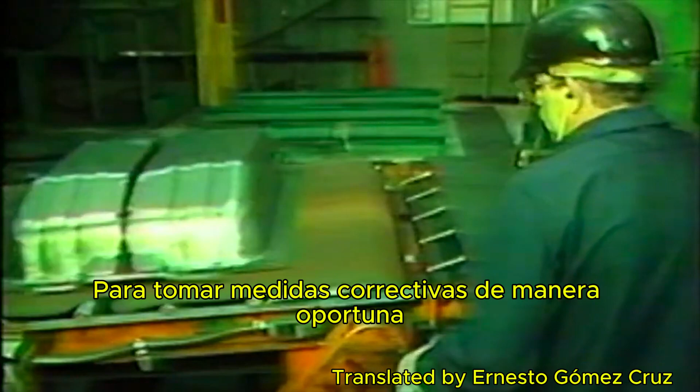Even if layout and operator skills are improved, further gains will not be achieved without a reliable system for monitoring the operation. Also, we need to provide adequate feedback to the people. Quick detection of problems is critically important for taking corrective action in a timely manner. In this session, we will study the means of providing better monitoring and feedback in our daily operations so that our production system can become autonomously controlled.

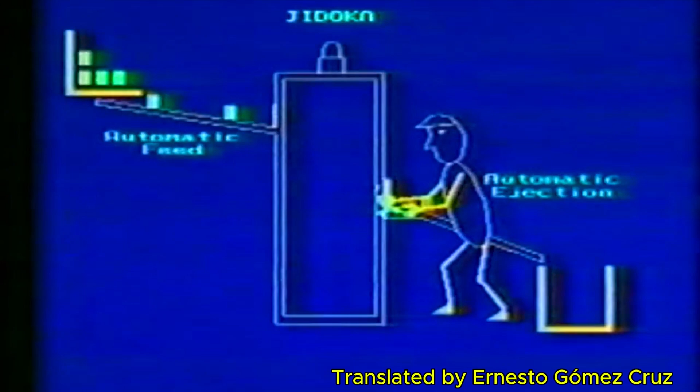Jidoka, or autonomation, is a concept developed in Japan to provide machines with the autonomous capability to use judgment. Without this concept, a machine may move by itself, but it may not be working for you. By using Jidoka, operators can be away or separated from the machine operations, and thus their time can be better utilized. Also, more rapid troubleshooting is possible since problems are discovered on the spot.

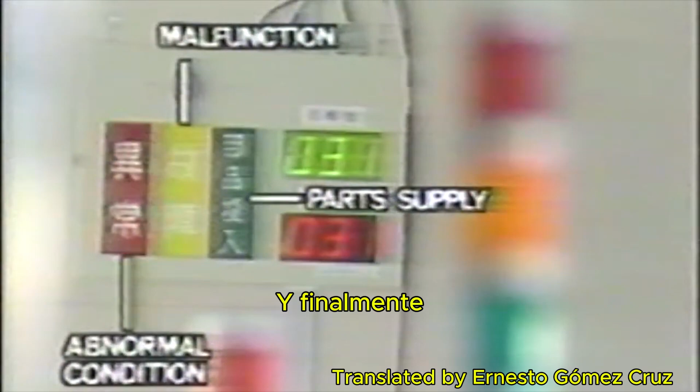Making this work, however, requires a great deal of discipline. Whenever a process is disturbed, we need to identify the problem by first stopping production. Then we resolve the problem and finally regain the streamlined flow as quickly as possible. Otherwise, the same problem may haunt us forever.

The Jidoka concept applies not only to machine operations but also to line operations. This is accomplished with line stop buttons by the operator, where he or she will push the button to get a supervisor's assistance when a problem arises. This concept is called line stop concept and is a variation of Jidoka. By stopping the line, we expose any problems preventing the production of quality products on time so that we can take corrective action as early as possible.

If a line has repetitive problems causing frequent line stops, these will only be fixed by focusing people's efforts. Therefore, we need to develop an effective nervous system in our factory in order to expose the waste and to take corrective action. Jidoka, in its broadest sense, is therefore a concept for exposing problems and taking corrective actions autonomously. To do this effectively, there are several techniques that we can use in developing an effective nervous system. They are Andon, Poka Yoke, and visual control.

Andon means lantern in Japanese. Just as a lantern may guide people walking in the dark, an Andon light helps expose abnormal conditions in the factory. In other words, the Andon, or trouble light, will help abnormal conditions become obvious enough to catch people's attention. Buzzers, and in some cases video cameras, also facilitate communication without delay. When factory operations are linked by these means, the factory will function similarly to our reflexive muscle system. Just as our muscles will pull our hand away if we were to touch a hot plate, corrective action should be taken immediately.

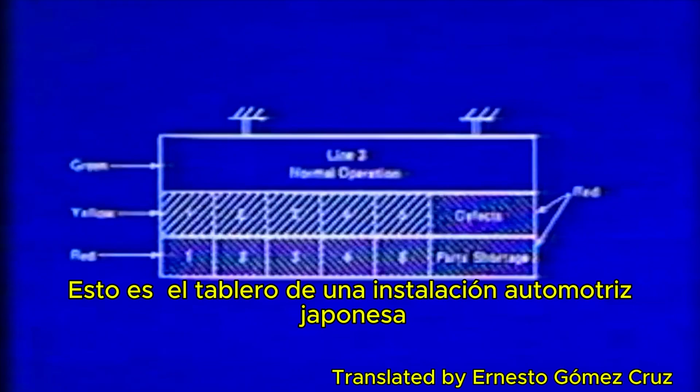This Andon board from a Japanese automotive facility is a typical example. As the light goes on, there may also be music coming out of a loudspeaker. This tune may be specific to a line so that people won't be confused if there are several lines in the same neighborhood. The next example is a parts delivery Andon.

As parts run low, the operator pushes a button that informs the material handler or tracker of his need. This signal is then displayed at the Andon board, signaling the tracker to deliver the parts requested by the operator. This helps keep communication smooth and line-side inventory low. Parts are delivered only when required, not too early, not too late.

Another example of this reflexive muscle system is called Poka Yoke. Poka Yoke is a Japanese word that translates as foolproof or fail-safe mechanism. Poka Yoke helps make the operator's work easier, and at the same time, it eliminates the troubles associated with defects, safety, and mistakes in operation without requiring any undue attention of the operators. There are many different examples of Poka Yoke. This particular example is from Borg Warner.

As the U-shaped line was being developed, the employees came up with Poka Yoke so that they could run multiple machines without confusion. Another problem we encountered was the fact that now an operator had to have more skills. He had to run 3 different kinds of operations rather than just one. And so in doing that, it's easy for an operator to get confused and to load a part backwards and possibly wreck it. And we had that problem on our hobbing machines.

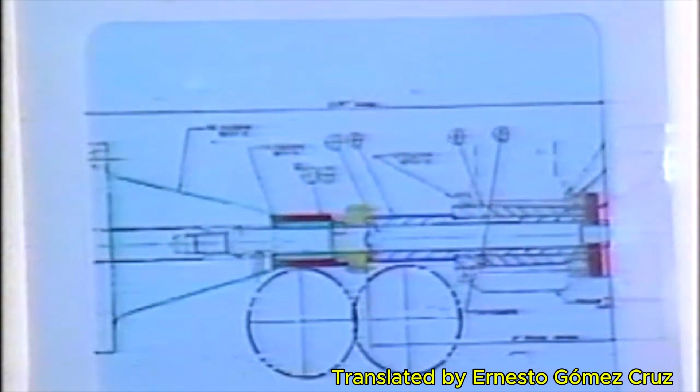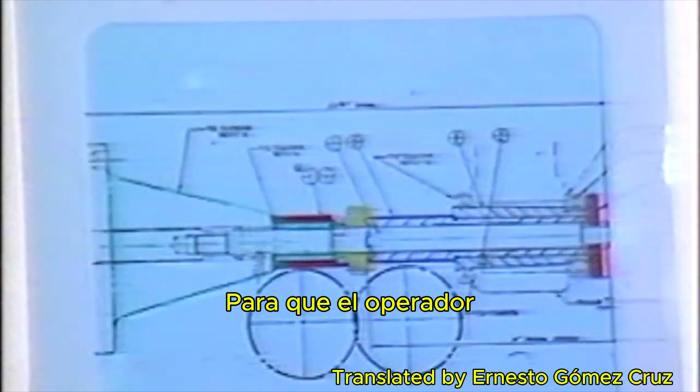And this is the little idler gear, shown here in yellow. And there's a problem with that part. If you load it on the machine backwards, then the teeth are on this side rather than on that side. So when the tool slide comes in on rapid traverse, we would break this cutting tool. And those cutting tools come at about $1,000 a piece. So we came up with the idea to Poka Yoke this so that the operator physically cannot load the machine and start it if he loads it backwards.

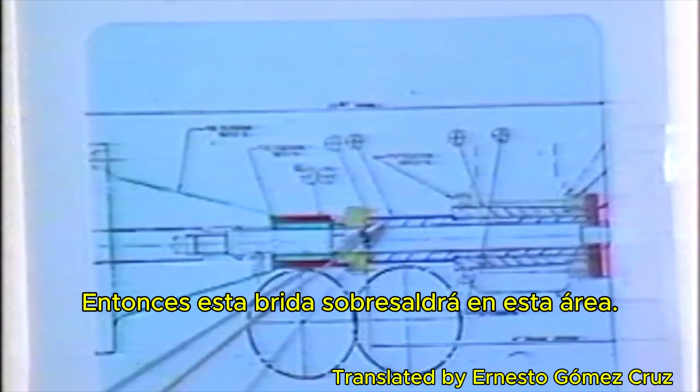And all we did was, shown in red here, is a little collar that slips over the arbor, and it has some little projections on it that go over that flange. So if the operator puts the part on backwards, then this flange will stick out in this area, and then the clamping mechanism here on the end will not clamp. So you cannot load the machine backwards and therefore break the tool.

This is an example of Poka Yoke from the welding shop of a Japanese automotive parts manufacturer. Since many welds were required in this assembly operation, sometimes a weld was skipped. This happened a few times a month, causing complaints from the customer. However, an idea was generated to make a gate, and only when all processes were completed would an electrical signal open the gate up. Since this gate wouldn't open if a step was missed, this type of mistake was totally eliminated.

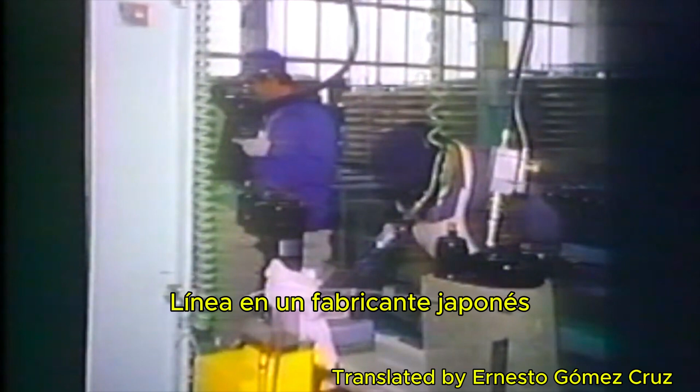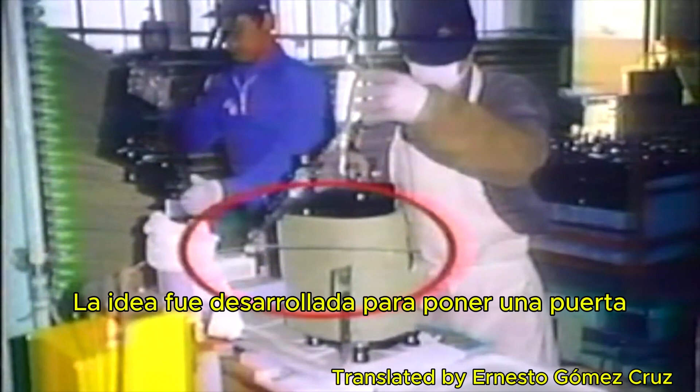This is an example from a compressor assembly line in a Japanese manufacturer, Mitsubishi Electric. In this operation, the operator puts oil into the compressor, but since you can't see from the outside whether oil has been put in or not, mistakes were made. Sometimes too much oil was put in, sometimes none at all. The idea was developed to put in a gate that only opens after the right amount of oil has been put in the compressor. The gate opening notifies the operator that he or she need not be concerned with the oil level.

This is an assembly line in the household goods division of the Japanese manufacturer Aisin Seiki. In this line, different parts are used for different models of their product. Since mixed production requires more frequent and faster model changeovers than a conventional line, the people came up with the idea of using a light indicator to distinguish the different models as a reminder for the operators.

If we compare these previous examples to this example, where incoming inspection is taking place to check the parts from suppliers, we should understand the benefit of practicing quality at the source. In principle, the people who are providing parts should be responsible for their quality, delivery, and cost for their customers. This provides quick detection and correction of problems, while the other is a very slow process.

As these examples of line stop, andon, and Poka Yoke demonstrate, the Jidoka concept can be used to develop an autonomous control system. If we use visual aids to practice this communication and control, we call this visual control. As the need arises and is manifested visually, we take action. However, it requires a great deal of trust and discipline among the people involved for the system to function properly.

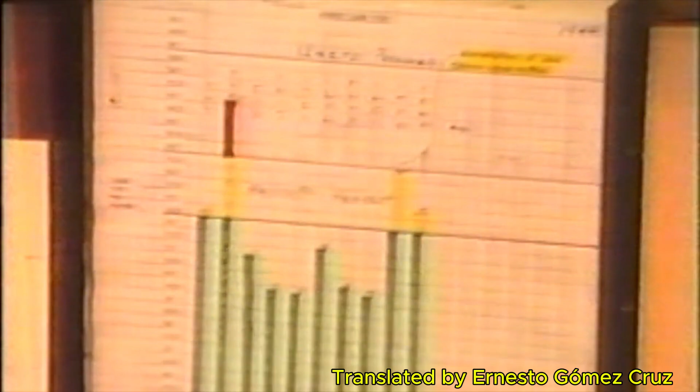If we expand this notion of autonomous control, the Jidoka concept may include the display of charts describing the key indexes, production control boards comparing the scheduled production with the actual, posting pictures from around the factory to address housekeeping efforts, improvement boards explaining before and after situations for people to learn how improvements were achieved, and even yellow lines on the floor showing where to store parts can become part of this monitoring and feedback system. As Jidoka and visual control will increase communication, plant newspapers and photos can also help promote better communication.

We try to do different things. We try to make it more like a family, and what we try to do is get good communications between the different shifts and between the different areas that they work. And one of the ways we've been doing this is through this monthly or so newsletter. And in fact, it's called In Focus. What we do is try to get input from the owner-operators as well as the engineers and the manufacturing managers and production control and everybody, just to get little 2 or 3 sentence news items that people might be interested in, when machines are going to get moved, when things are going to be realigned, when there's cost reductions, they found a cheaper way to do this, or part changes, or just a lot of different information.

Also, we try to have at least a couple pictures in it each time. It's nothing too professional. We just take Polaroid pictures, copy them on just a plain copier, 2-sided copies, do it on my PC with just a word processing package. It's not fancy, but it works.

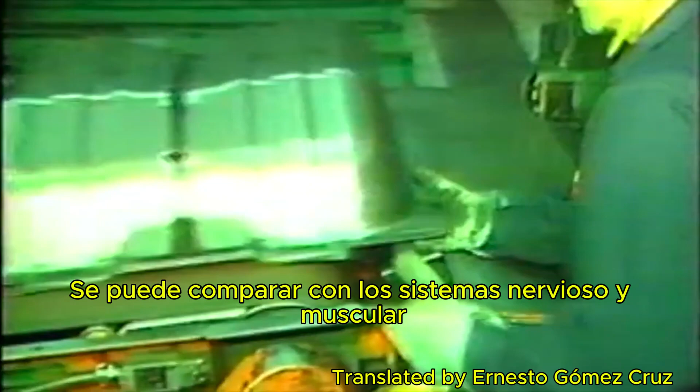In summary, practicing visual control and jidoka can be compared to the nervous and muscular systems in a human body, which can respond readily to environmental changes. The point is to develop a self-controlled system. As mentioned before, however, accomplishing this requires the involvement of everyone.

I like the analogy of the nervous system and information system, plus the simple means of communication. But does this mean you are against the use of computers? Not necessarily, but like anything else, if we do not have an adequate ability to use them, we may find them producing or storing a lot of waste. Aha! So what you are saying is we need housekeeping for the information processing activities as well. Right. Let's take a look.

We began with an order entry process where the order was called in or faxed in, entered into our mainframe. Mainframe would generate the shipping paper and the documentation necessary to pick material and issue an order to the shop floor for the shop floor to begin the manufacturing process. The overall cycle of that was about 3 to 4 days. It currently takes us 15 minutes or less to do the same process.

And we've just shortcutted, in effect, the computer system by having, when the order comes in, a copy of it delivered directly to manufacturing. Then a parallel activity occurs. Since all the material is available to build a product at the point of use, the actual customer order becomes a document that drives the factory.